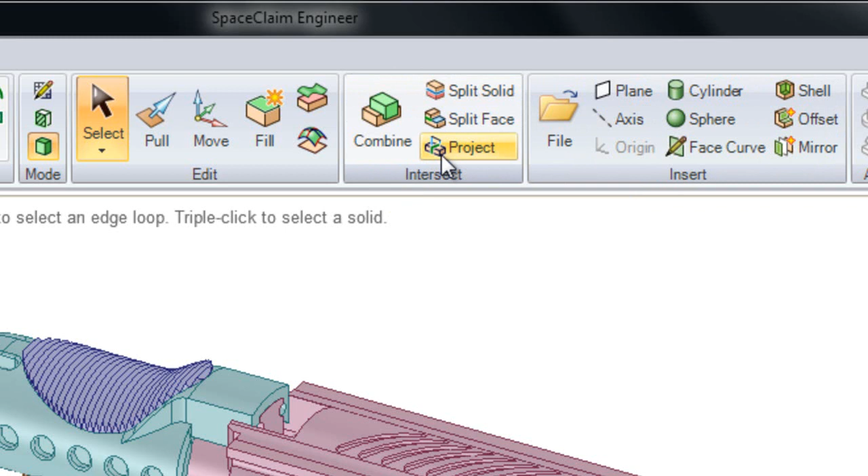The intersect group in the Design tab lets us do all of our Boolean operations inside of SpaceClaim. We'll be looking at the differences between combine and split solid today, how to use combine to cut multiple targets at the same time, and how to use the project tool to project edges or text onto a model.

The first thing I want to do is create a surface to help show the differences between combine and split solid. I want to select on the axis to sketch on, but sometimes that can be difficult. If I try to roll my mouse through the model, you'll notice I have to roll several times in order to get the axis.

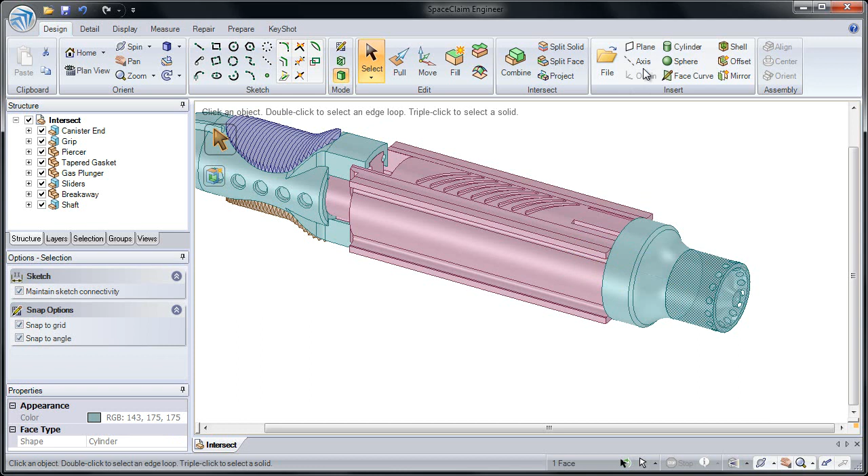A faster way to do this would be to select a cylindrical face and place an axis into the model from the Insert tab. That places an axis that's easily selectable because it sticks out of either side.

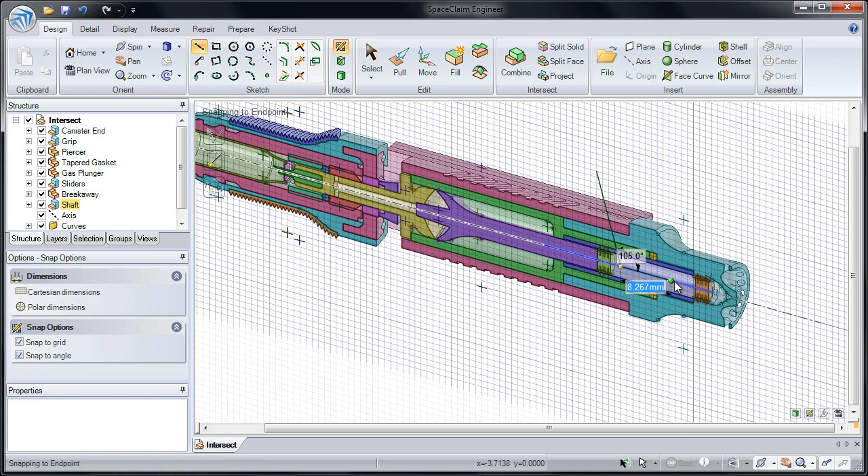Now I'll select the axis and create a quick sketch. I'm going to sketch 3 lines starting from outside of the model, running along the axis, and then back out again. Now when I hit pull, we have 3 curves in space.

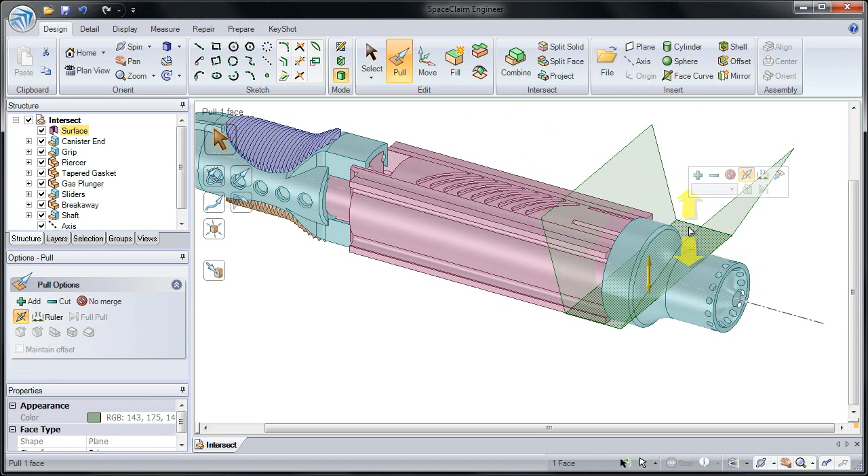I'll double click to choose them and then pull them in both directions. I'm doing this so I can create a single surface that has 3 faces. Notice our new surface has been created and it has 3 faces on it: 1, 2, 3. Now let's use this surface to help look at the differences between split solid and combine.

Combine always stands for the combination of 2 objects. This can be 2 solids, 2 surfaces, a solid and a surface, a solid and a plane, or even a surface and a plane. And you can use this to merge or split.

Split solid, on the other hand, always splits a solid. It always cuts a solid by a planar face, a cylindrical face, a spline face, or a plane.

So let's say I wanted to use split solid to cut this blue model by our surfaces. First, we'll click the target object, which is our blue solid. Next, notice it's letting me cut with 1 single face. If I choose this face to cut, it splits this solid into 2 pieces.

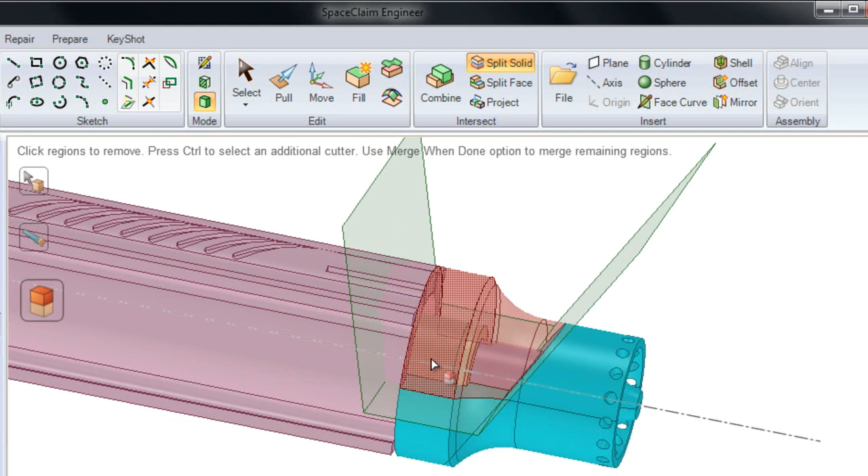If I wanted to split with our other 2 faces, I would need to hold Control to select an additional cutter. So if I hold Control and select this second face, it cuts this solid into now 4 different sections.

But I would still need to cut it a 3rd time on this face. So if I hold Control and select on our 3rd face, now it's split into 6 different sections. And I could click on our center one to remove it.

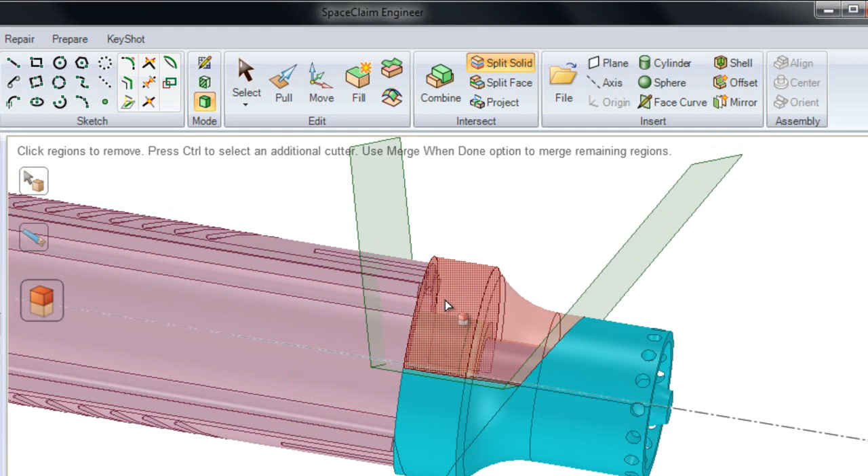But let me undo. I'm going to undo 4 times, because now let's look at how combine works to do that.

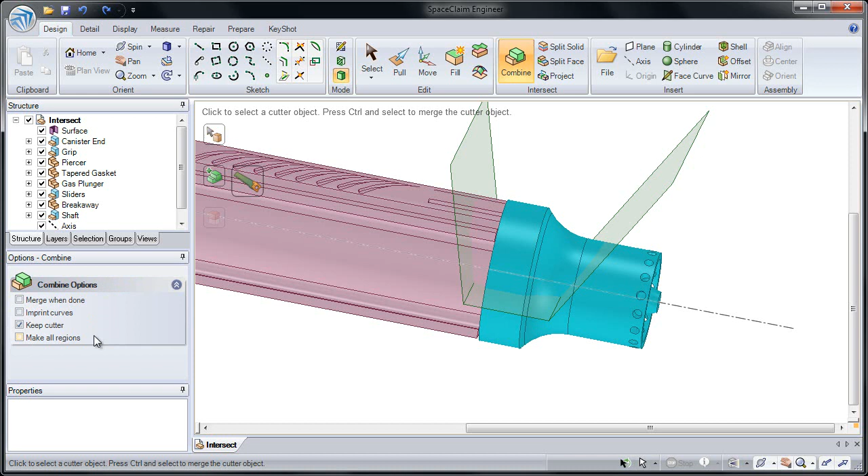Combine always cuts with an entire object. So if I click this as the target object, I'll choose Keep Cutter in our options on the left middle side of the screen. Remember, we have options for every tool that we're in. And I'll select our cutter surface.

This cuts with the entire surface body, so it splits this into 2 sections automatically. So depending on what action you'd like, you can determine whether you should use combine or split solid.

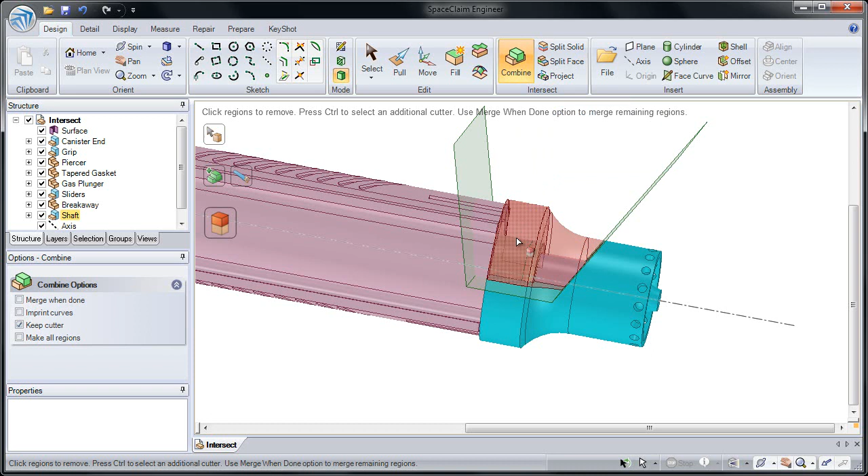If you're splitting a solid with 1 face, split solid is a very fast action and doesn't require you to insert a plane. However, if you want to split with an entire body or multiple faces on a surface at the same time, it's usually a good idea to use combine, to cut with a surface and then to remove the region that's interfering.

So take some time to create the surfaces and use combine to cut this section of our blue model out.

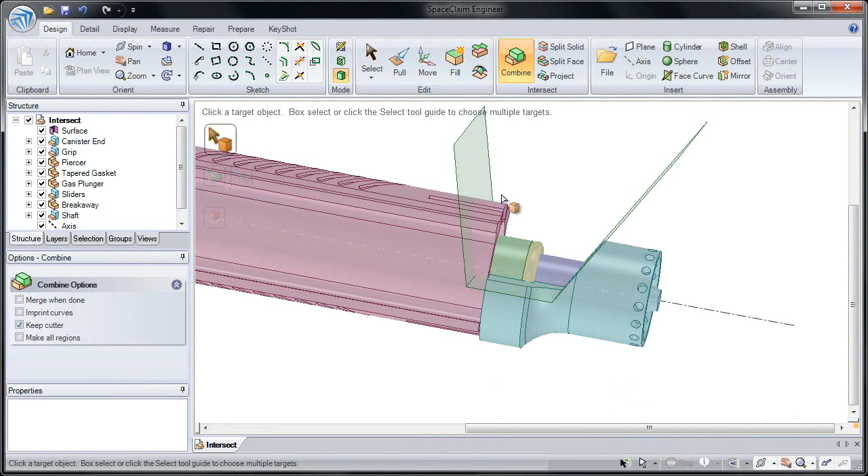Now let's look at cutting multiple solids at the same time. I'm going to remove this surface to start, and I want to cut all of these models with a plane. So the first thing I'll do is select the axis and place a plane into our assembly.

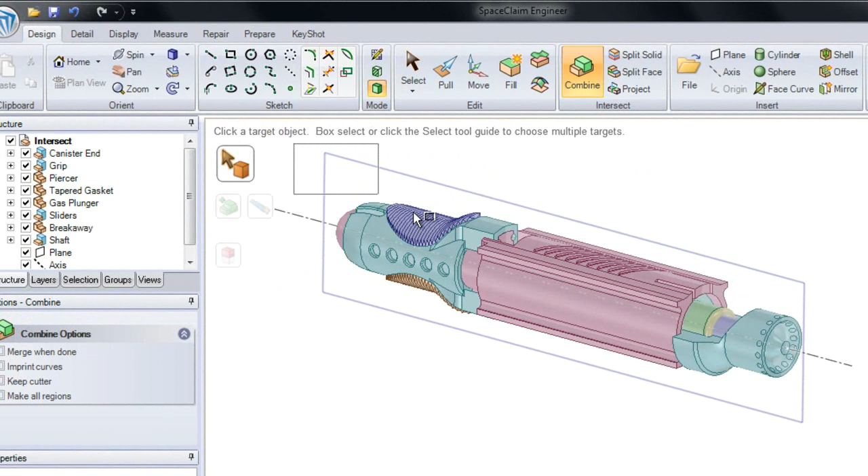You'll notice if I click the Combine tool, it says click to select a target object, or I can box select to choose multiple targets. I'm going to box select our entire assembly, and you'll notice that all of them highlight in a neon color, indicating that they're all targets.

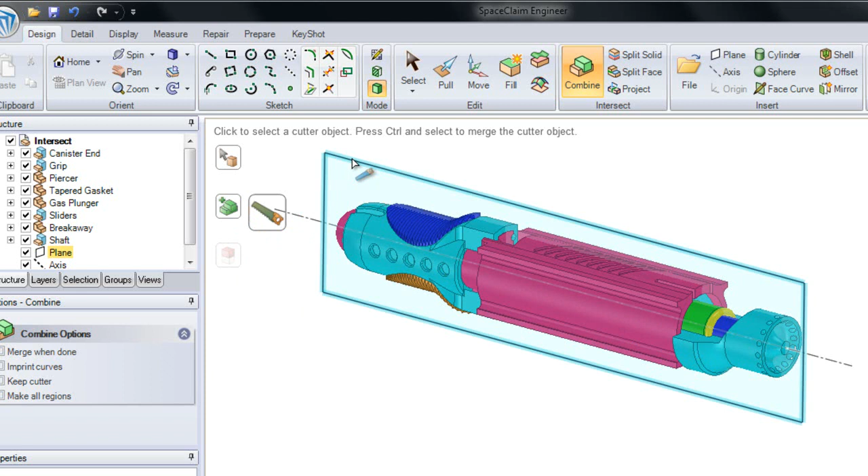Now I'm down to select a cutter or merge. I want to select this plane as a cutter. You'll notice when I click the plane, it's going to cut all of our solids at the same time. Notice now all of these models have been split in half.

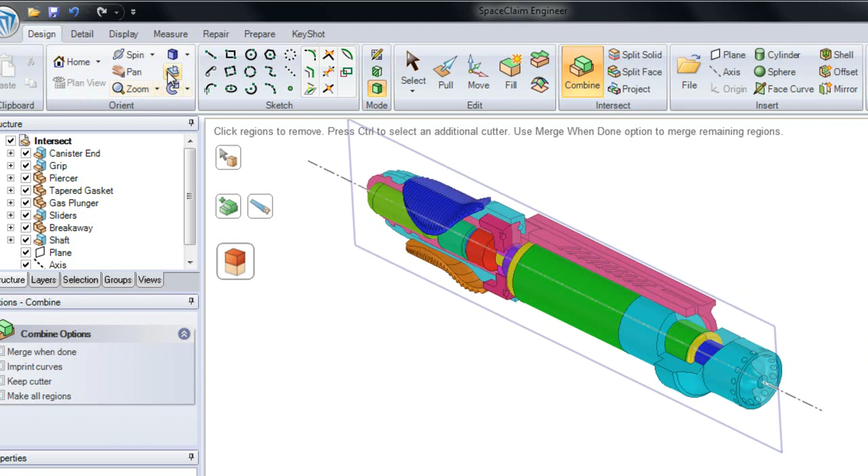And if I click on either region, I can remove them. But let's look at a fast way to remove all of these. I'm going to go to our Orient group in the top left of the screen and go into a right view.

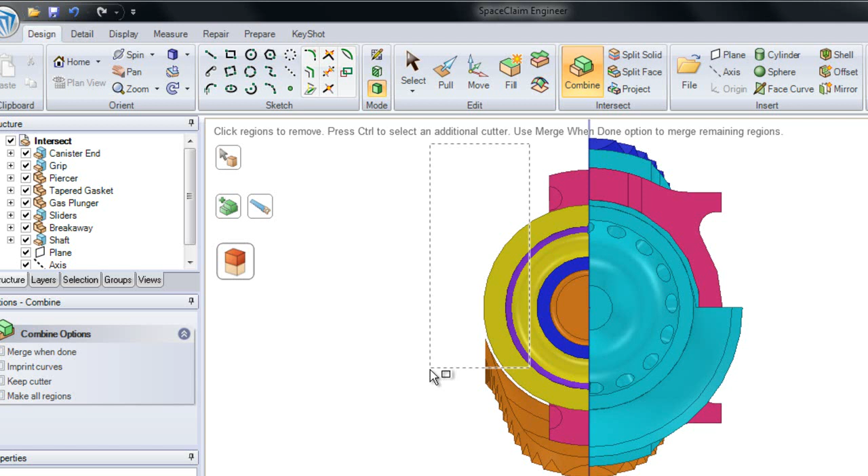Now you'll notice that if I click, it's very easy to select everything on one half of our assembly. Or I can do this in a faster method by box selecting to remove them. If I box select from right to left, anything that's touching my box will be removed. This makes it very easy to make a few box selects and remove everything on one half of our model.

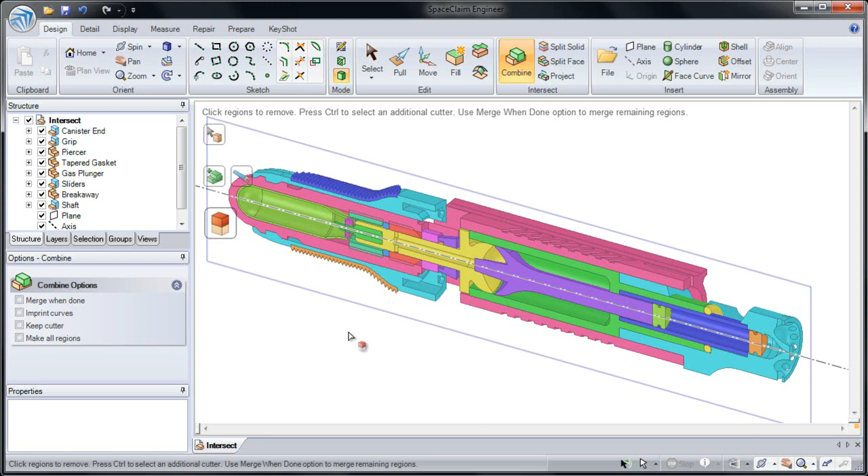So if I go back into a home view, you'll notice that I've cut everything in half, so now I can see inside of our model very easily. Just as a note, this is different than a cross-section. A cross-section visually lets you see the section and see inside of a part, whereas cutting the model in half, I've actually removed everything on one half of our model.

So take some time to place a plane in the model and try to cut all of the solids at the same time, and then remove them with a box select.

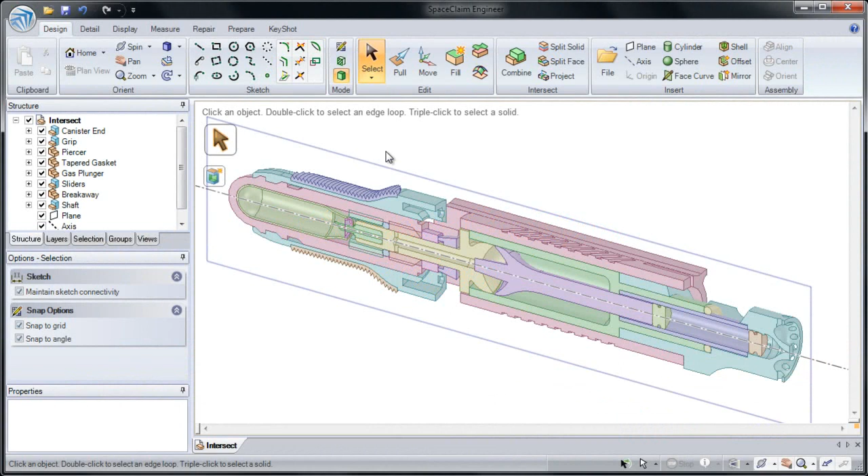The last thing we'll look at is our project tool. So I'm going to rotate to the other side of our model and use project to place some text on our part.

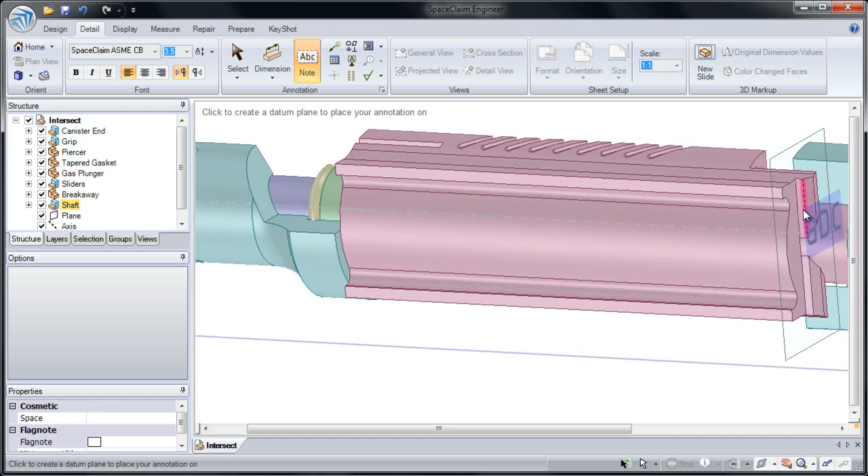To start, I'm going to click our Detail tab and place a note on our model. If I click the Note tool, you'll notice that whatever face I hover over, it asks me if I want to place a plane there. I'm going to place a note on this face here.

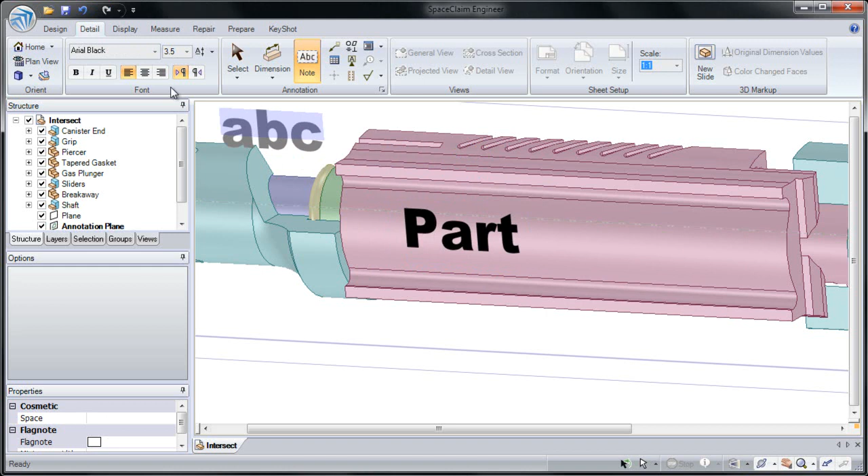Now I can choose any type of font to use. I can choose Arial, I can choose Calibri, or I'll choose Arial Black. Whatever I type will end up in the note, and I can drag the note to position it on the plane. Now that I've created my note, let's project this onto our part.

We'll do that by clicking the Project tool. First it's asking me to select what I would like to project, and I'm going to select our note. I could select our note, I could select edges, or I can select an entire solid.

Next it's looking for a direction. It will always project normal unless you specify a direction. And last, it's asking to select a target face.

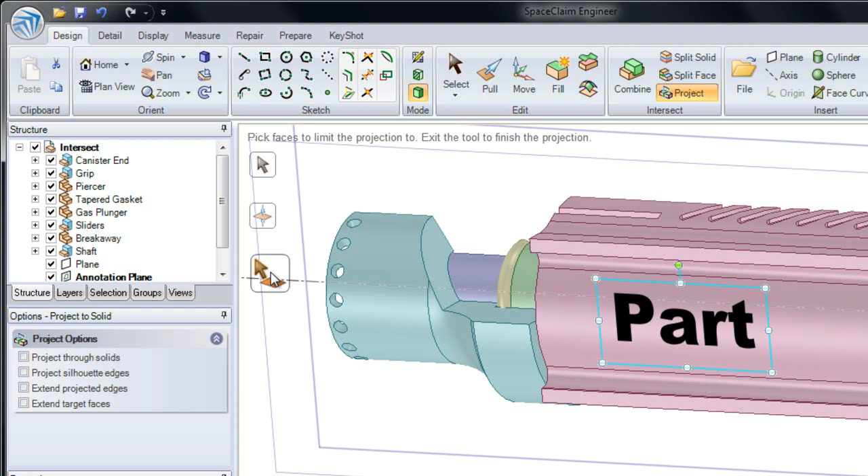If you're working on a single part, in most cases you won't have to select a target face. But if you're working on an assembly where there's several faces behind the note or the projected object, you should probably select which face you'd like to project onto. I'll select on this pink face behind the note.

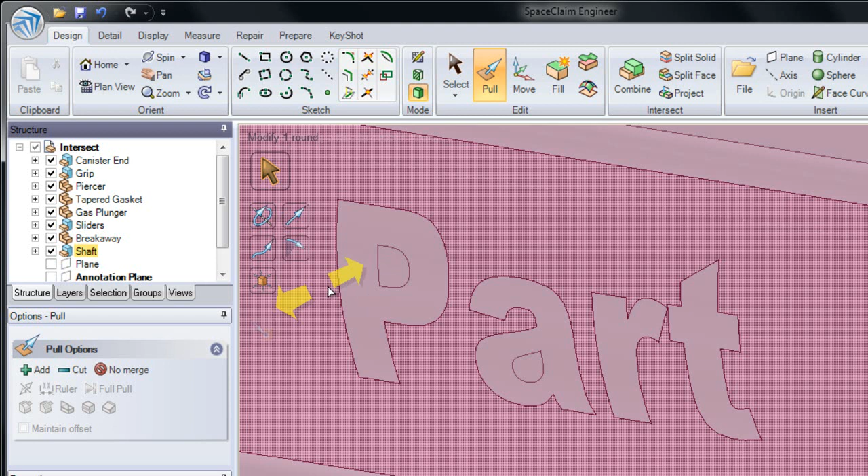Now you'll notice that you can see the edges of our note projected onto the part behind it. And if I click Enter or Pull, we now see those curves projected onto the solid. So our face has been split into different sections, and if I select on those curves, I can pull them outward to thicken them.

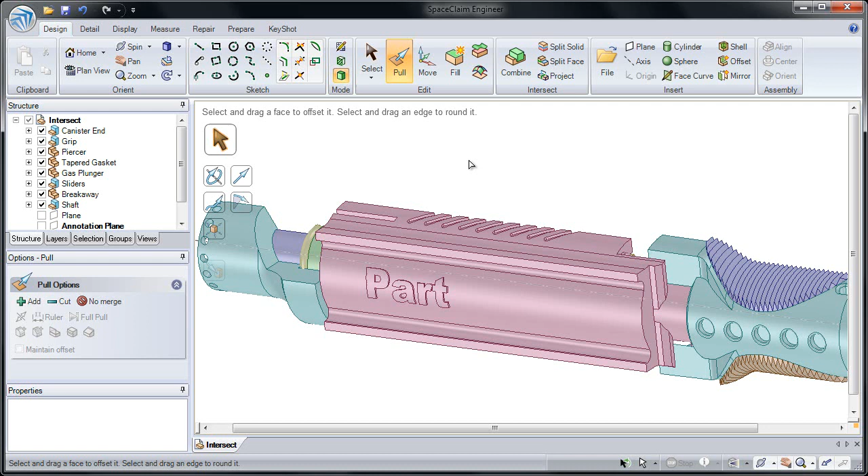So I hope you've seen how you can use our intersect tools to cut multiple targets at the same time, and also how to project curves or text onto a model.